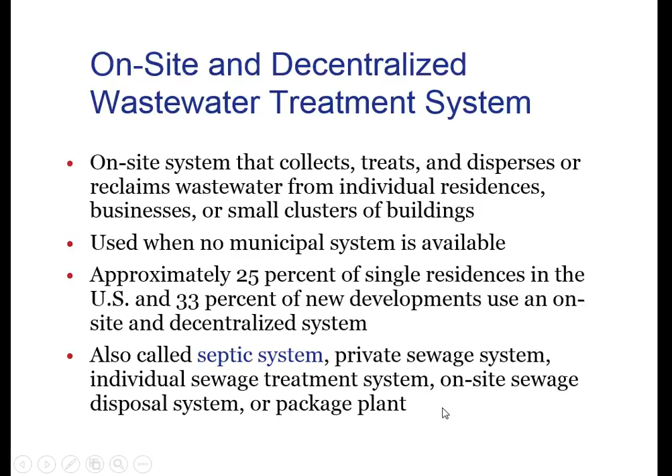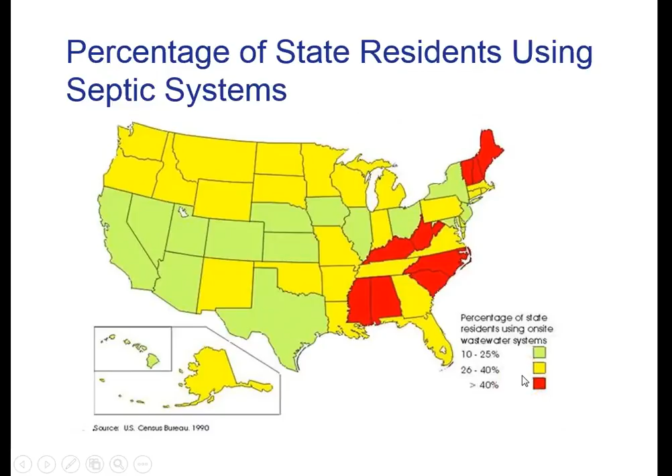But if we think about it, this is the newer, greener option. So as architects and civil engineers, we should be thinking about pushing people toward using these more environmentally friendly methods. So how does it work?

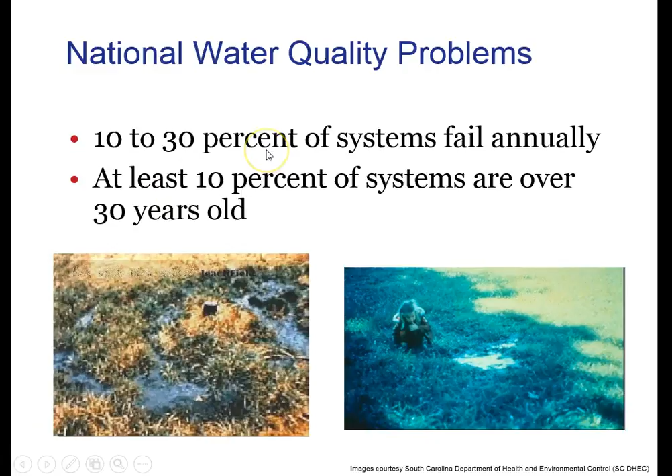About 10 to 30% of the systems fail every year, and at least 10% of the systems are over 30 years old. This is the problem: the systems out there are very old, and people don't take care of them the way they should. That's why we have systems failing. Basically, the systems are really old and they need to be upgraded, replaced, and recycled.

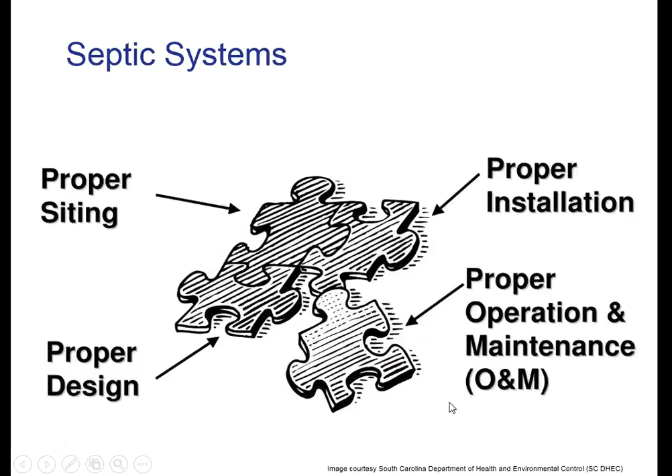When you're putting one in, you need to put it in the right place. It needs to be installed properly, with a good design, and you have to keep it cleaned out and maintained. It's kind of like your air conditioner at home—if you don't take care of it, it's going to go out. The same thing happens with septic systems.

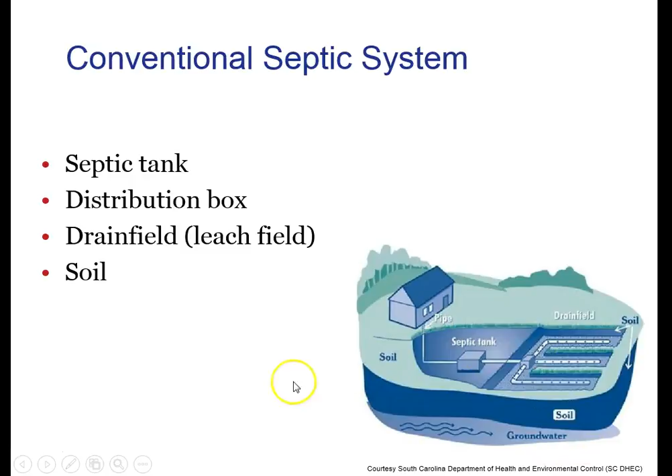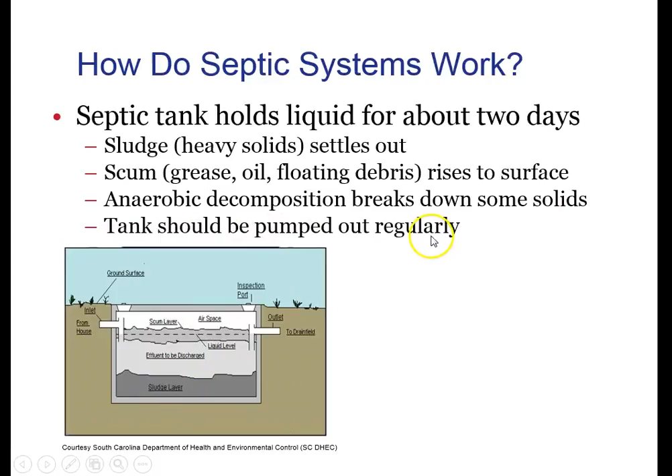And then anaerobic decomposition breaks down some solids—this is microorganisms that break down some solids. But the tank has to get this sludge layer and scum layer pumped out regularly. A guy comes in a truck, puts the pipe down in the hole, and cleans this out.

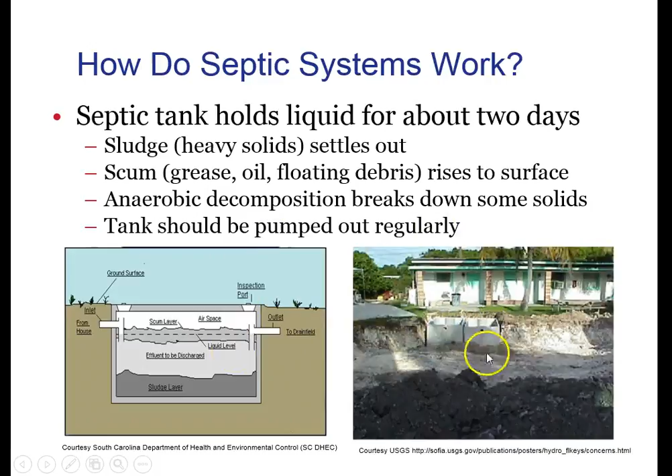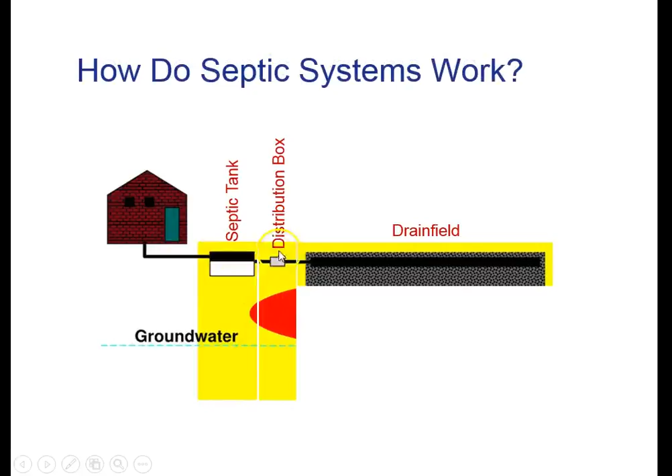So again, this is what I was talking about. Here's that big tank. There's a little distribution box that just distributes the water out to the drain field. And then we have aerobic soil—this is where the water's coming down, and more microorganisms and just the dirt are finishing this. Groundwater's down here, and all this water eventually goes back into the groundwater.

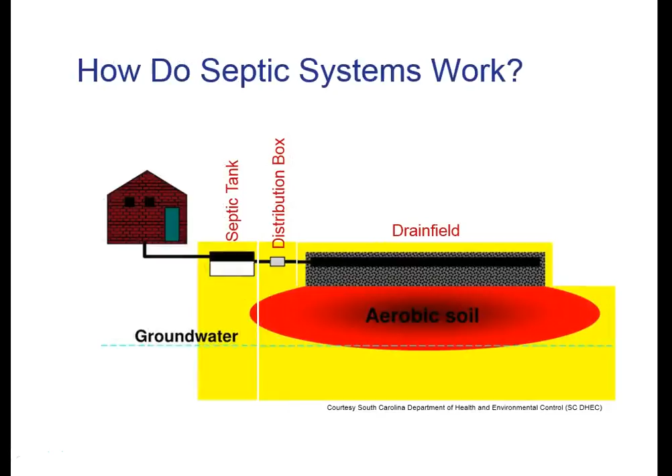If you're going to put in a septic system, there are tests you have to do to make sure your ground is going to work, because your ground has to be such that the water can come through it. We did some information on soils before, and we talked about plasticity and liquid limits. You have to have the right kind of soil here for this to work.

That's this first one—you have to check with codes. They do a percolation test, which means: will the water go down? They dig a little hole, put water in it, fill it with water, and then measure how fast the water goes down. The length of the drain field, based on how quickly the water will go down, depends on how big of an area you need for that water to filter down.

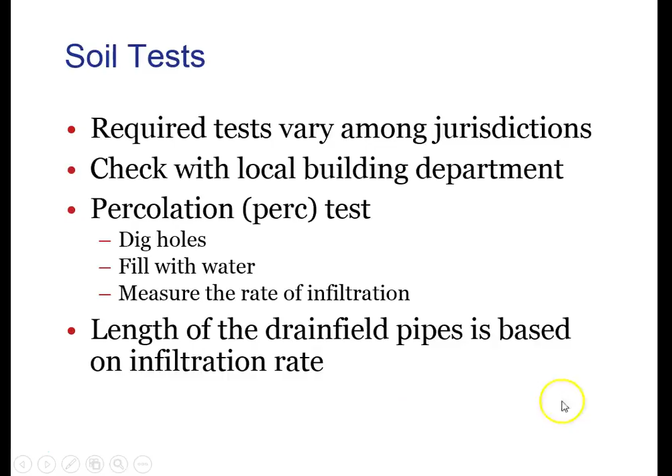Here's some reasons it fails: the soil wasn't good to begin with, the water table is really high, you didn't put in a proper system—all of these are just you didn't put it in right. It was too small, it wasn't built good, or you didn't maintain it well.

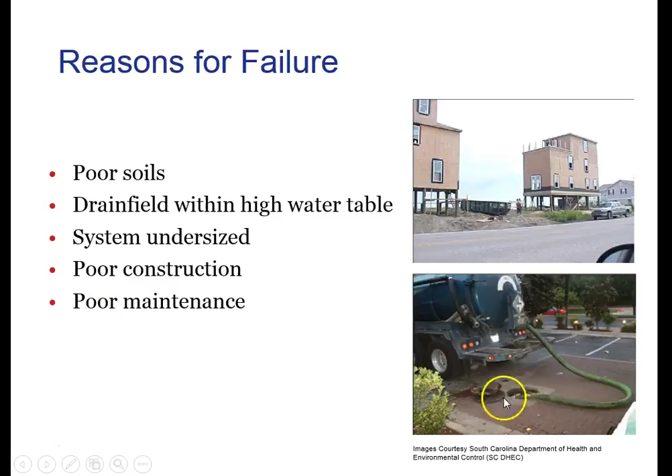Here's a picture of that truck that literally just cleans these out. Okay, that's it for wastewater.